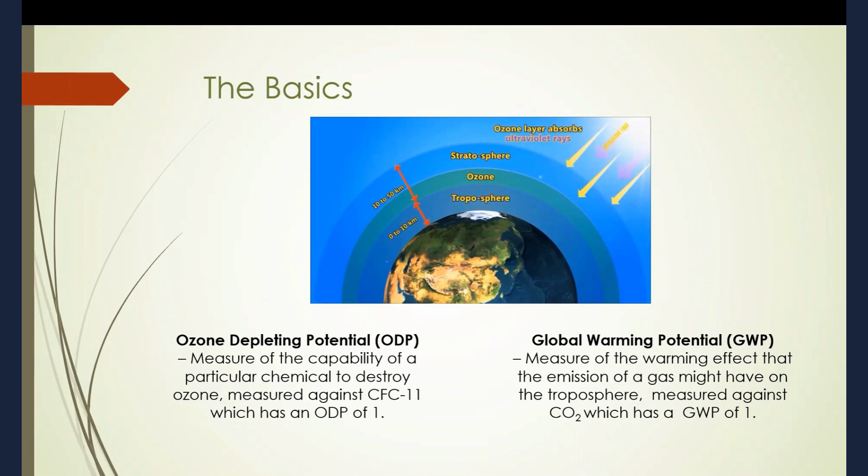Human-caused greenhouse gas emissions are trapping heat in the atmosphere and raising global temperatures. Again, all countries have signed on to the Paris Agreement with the understanding that we're all collectively responsible to try and keep global warming under 2 degrees, and preferably under 1.5 degrees. However, current research is predicting we are on track to cross the 1.5 degree threshold between 2027 and 2042. Climate change is not a future problem, it's a today problem. The 4 main gases responsible for global warming are carbon dioxide, methane, nitrous oxide, and fluorinated gases.

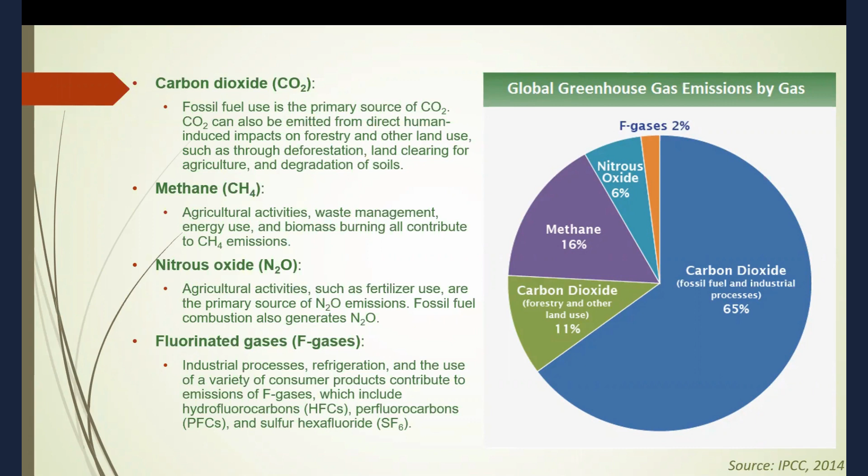These gases will all need to be addressed in some form or another, and they all pack a different punch when it comes to global warming potential. Carbon dioxide, with a global warming potential of 1, accounts for 76% of all greenhouse gas emissions. Conversely, fluorinated gases only take up 2% of total global greenhouse gas emissions, but can have a global warming potential as high as tens of thousands.

Both of these gases have decay rates up to thousands of years. You can take note of the numbers for methane and nitrous oxide, but for this presentation I won't be discussing these two gases as they're mostly related to agricultural activities. As one can imagine, comparing these gases to each other can be difficult, and so CO2e, which stands for carbon dioxide equivalent, was created as a way to compare emissions from one gas to another on the basis of their global warming potential by converting the amounts of gases to their equivalent amount of CO2.

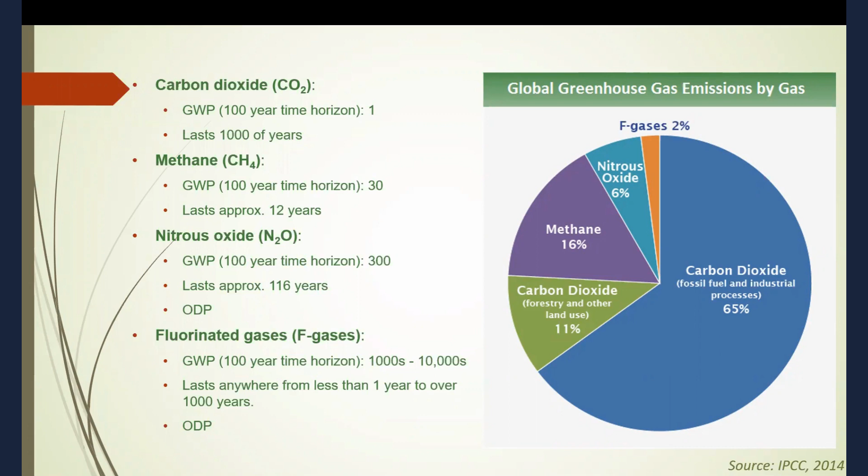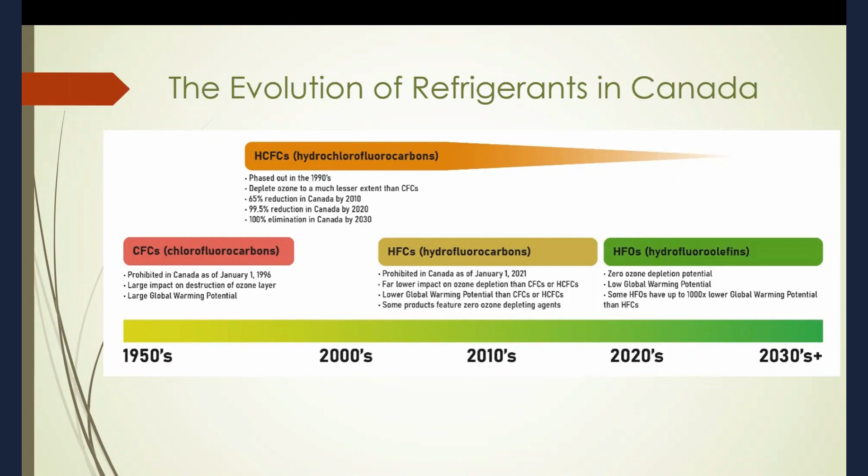I want to quickly touch on refrigerants with respect to Canada. I don't particularly like this graphic because it implies we finally found a green solution to refrigerants, when the reality is we've just slowly been replacing it with something less bad. For the case of HFOs, its low global warming potential is relative when compared to HFCs, but not low in reality.

So on January 1st, 2021, HFCs was the typical blowing agent found in almost all spray and rigid foam insulation, which is now replaced with HFOs.

It's important to realize that a narrow focus on operational emissions can be counterproductive and have unintended climate consequences. The term energy efficiency misses the point when it comes to climate change. Energy and greenhouse gases are not necessarily synonymous. Energy efficiency is just one consideration in an overall greenhouse gas emission reduction strategy, but not a standalone solution to greenhouse gas emissions.

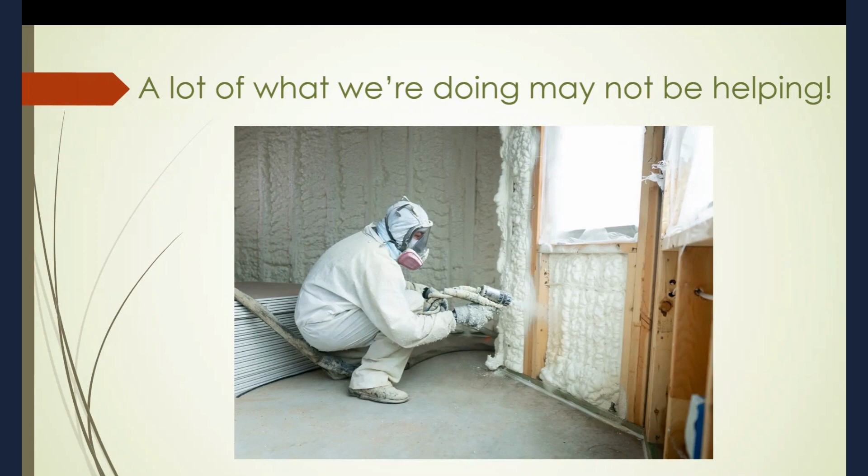I'll be using the terms embodied carbon, material carbon emission, and upfront emissions here interchangeably throughout the presentation, but just want to mention that they're all basically the same thing. The term embodied carbon has evolved over the years, and industry is now leaning more towards calling it upfront emissions.

When we talk about the carbon footprint of a building, people typically tend to look only at operating carbon, but it goes much deeper than that. To assign proper definitions: operational carbon is the emissions derived through the use of the building from day one of occupancy till its end of life. And embodied carbon is the emissions related to making, installing, using, and disposing of a given building material used in constructing the building till its end of life.

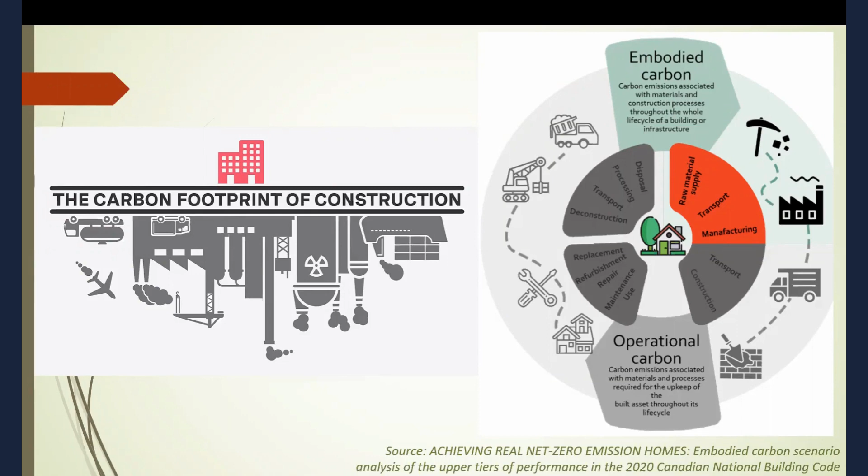Let's go ahead and unpack the image to the right. It's called the carbon life cycle and can be broken up into several stages. The A1 to A3 stage refers to the raw material extraction, transportation, and manufacturing of a product. This first stage of the life cycle is mostly controlled by suppliers and manufacturers. It is the responsibility of the designers to specify low embodied carbon building materials.

A4 to A5 refers to the transportation to site and the installation of the actual product. This is where builders and project teams can control emissions. Can we reduce the impact of transporting things to site or reduce the carbon impact of installing those materials?

B1 to B5 refers to the embodied carbon of the building over its lifespan associated with maintenance, repairs, replacements, etc. Notice operational energy down at the bottom, used to or required to operate the building, is noted here separately.

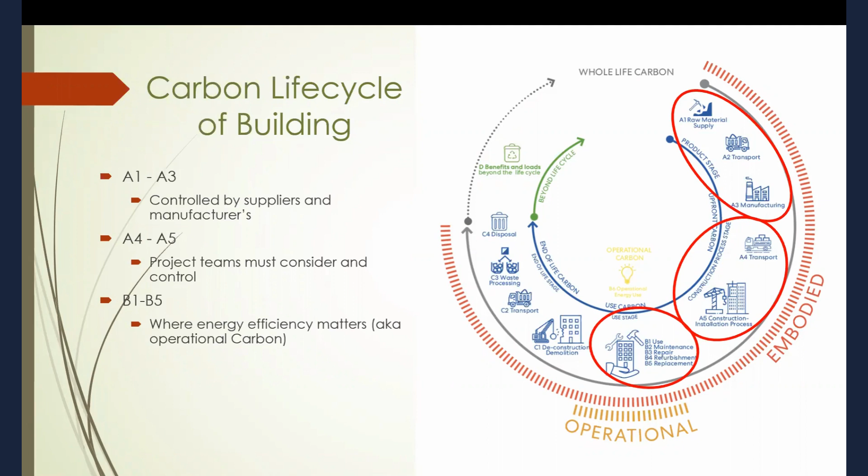C1 to C4 refers to the end of life stage and involves emissions from deconstruction, transportation, waste processing, and disposal. This stage can have varying results for emissions, mostly due to the high level of assumptions that have to be made about what will actually happen to a product at its end of life in 60 or 100 years.

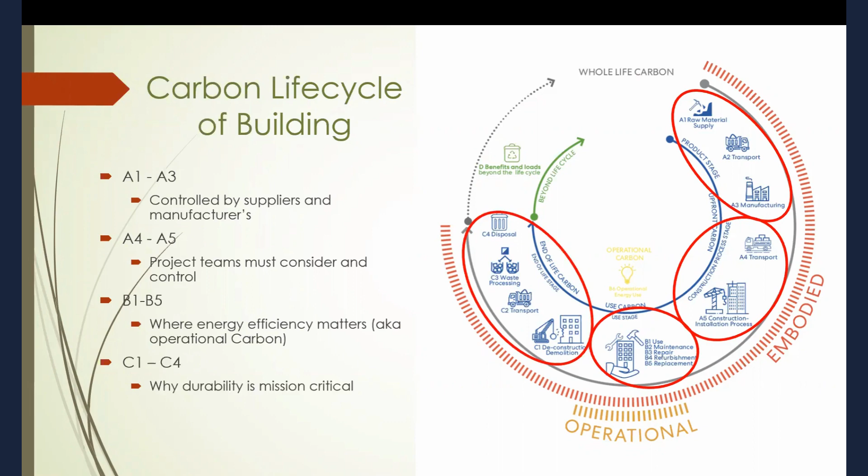The net result of all of these combined is the holistic picture we want to be looking at when it comes to embodied carbon. This image is also commonly presented in a table format, which may be more familiar to some of you. As I mentioned earlier, when talking about embodied carbon, which is the green line, notice that B6 operational energy is actually omitted. However, when discussing whole building life cycle assessments, the blue line, it is included.

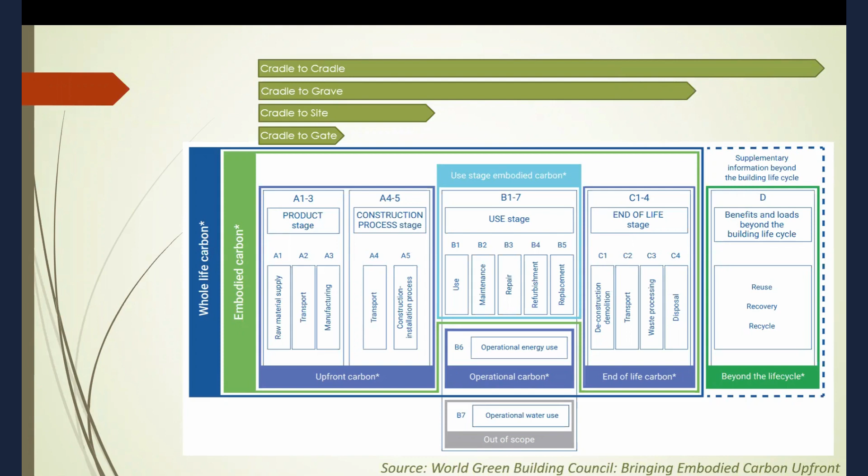Some other common terminology we'll hear throughout this presentation: A1 to A3 is often called cradle to gate. We'll be diving into this specific product stage more in the presentation coming up. A1 to A5 is commonly referred to as upfront carbon or cradle to site. Cradle to grave includes all of module A, then all of module B, B1 to B5, and then all of module C, C1 to C4. And then there's cradle to cradle, which takes cradle to grave a step further and includes emissions beyond the building life cycle that involve giving the product a second life under the reuse, recover, and recycle strategy.

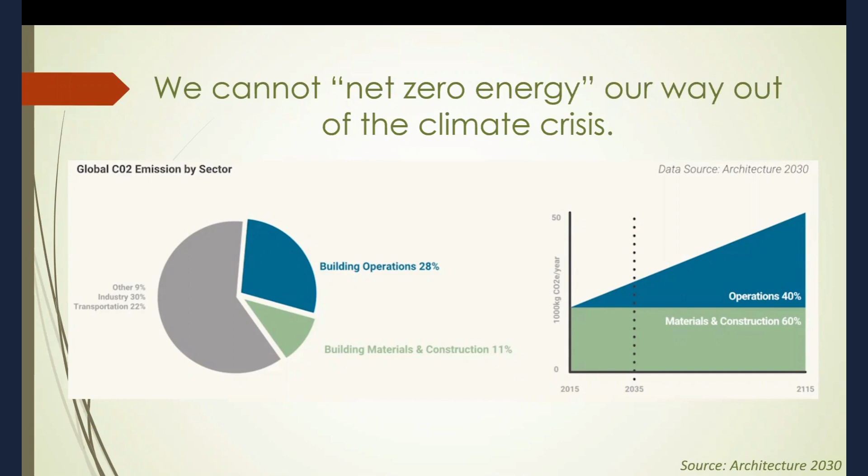If we're serious about hitting net zero emission targets by 2040 or 2050 even, we need to address both operational and embodied carbon at the same time, or we run the risk of striving towards net zero energy at the cost of net zero emissions. Typically, lowering operational emissions involves additional building materials and insulation. So in theory, our embodied carbon could go up as operational emissions come down, if not done responsibly.

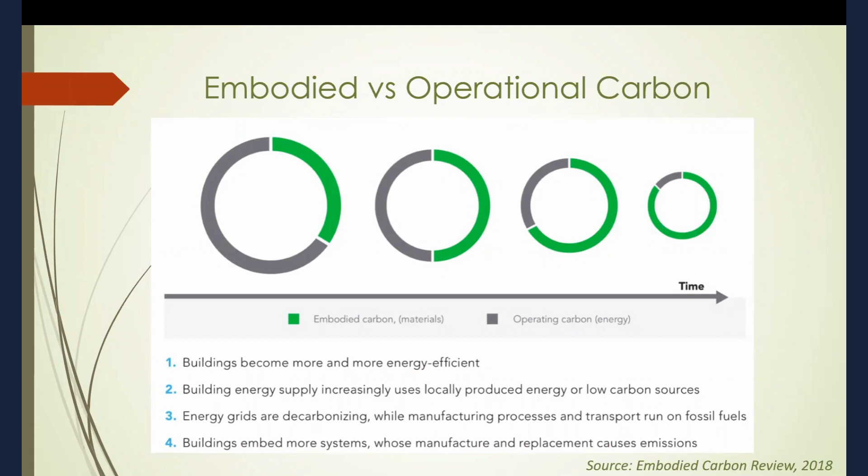As we make strides towards lowering our operational emissions, we can see embodied carbon actually starts to become a larger percentage of the smaller pie, which further drives home the fact that we cannot reach net zero emissions without also addressing embodied carbon. Historically speaking, cradle to gate, which is the A1 to A3 module that I had mentioned earlier, is typically responsible for the vast majority of life cycle emissions, to the tune of almost 70 to 80%.

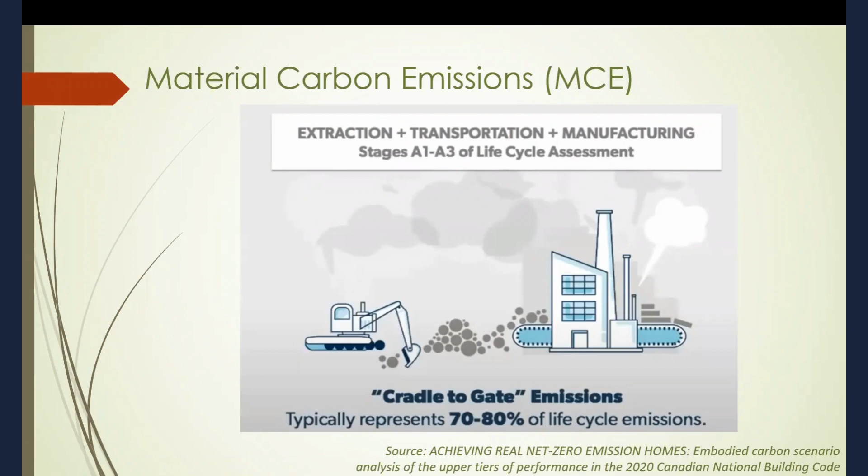To give you an idea of how much carbon emissions we're talking about, a typical low-rise home in North America has an average carbon emission footprint of approximately 250 kilograms CO2 equivalent per square meter of floor area. Canada annually is adding just over 56 million square meters of low-rise homes. This equates to 3.1 million vehicles driven in 1 year, or about 3.6 coal-fired power plants running for 1 year. Again, keep in mind, this doesn't include any operational carbon emissions or commercial buildings. This is just low-rise homes.

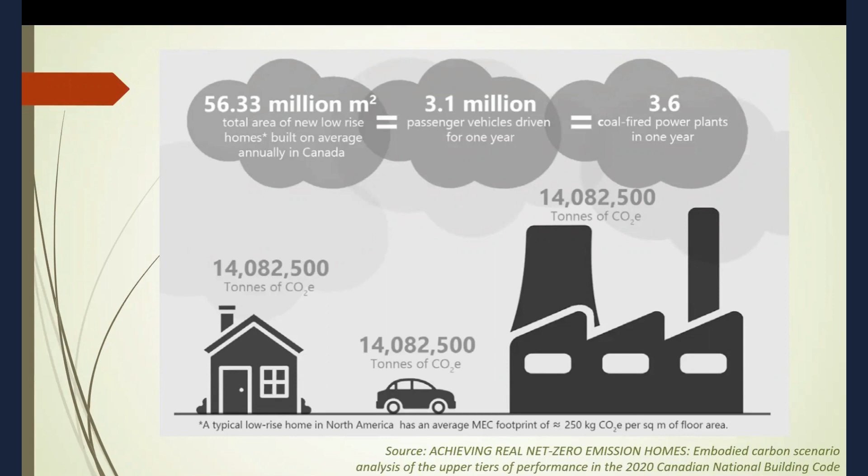So what's Canada doing about it? Well, unfortunately, currently no Canadian building code considers the greenhouse gas impacts of material carbon emissions. This issue is amplified as upfront emissions become a larger contributor to greenhouse gas emissions than operational emissions over the next 2 to 3 critical decades, especially if we're using building materials with high embodied carbon emissions to try and reduce the operational carbon emissions.

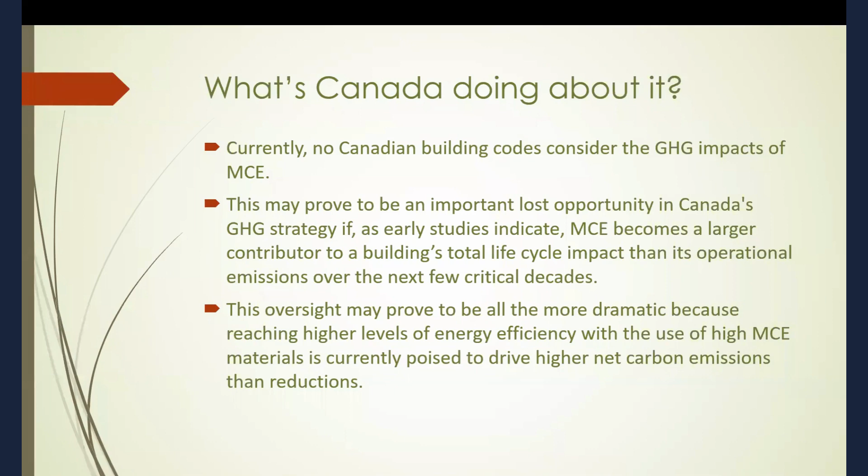Federally, Canada introduced the Federal Greening Government Strategy, which mandated reporting of embodied carbon in structural materials of new projects by 2022. By 2025, this would turn up a notch and mandate reductions in structural materials by 30%, along with complete whole building life cycle assessments. They also introduced LCA squared, which was designed to support low carbon procurement of materials. This policy only applies to new federally owned projects. And I believe there was an announcement today that this is actually being updated and tightened to become a little bit stricter and happen a little bit sooner.

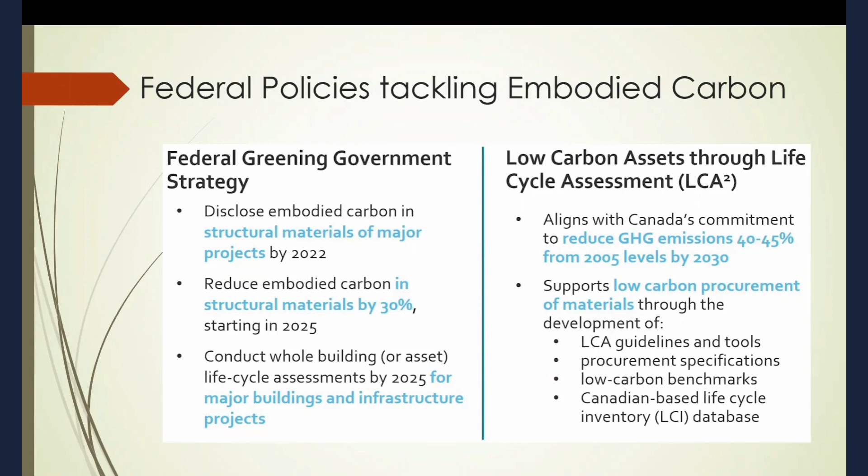On the provincial side of things, no province has come forward to specifically address embodied carbon head on, but BC is probably the closest, and that is largely due to the work being done municipally in Vancouver. Vancouver created the Climate Emergency Action Plan, which sets a target of a 40% reduction in embodied carbon emissions by 2030 from their baseline 2018 year. Their green building policy for rezoning also mandates reporting of cradle to grave emissions.

Toronto developed the Toronto Green Standard version 4, which mandates all city buildings and buildings being built to Tier 2 report cradle to site emissions for structural and envelope materials. Tier 3 buildings must demonstrate a 20% reduction in cradle to grave emissions against a baseline building. Edmonton currently only requires reporting of cradle to site emissions.

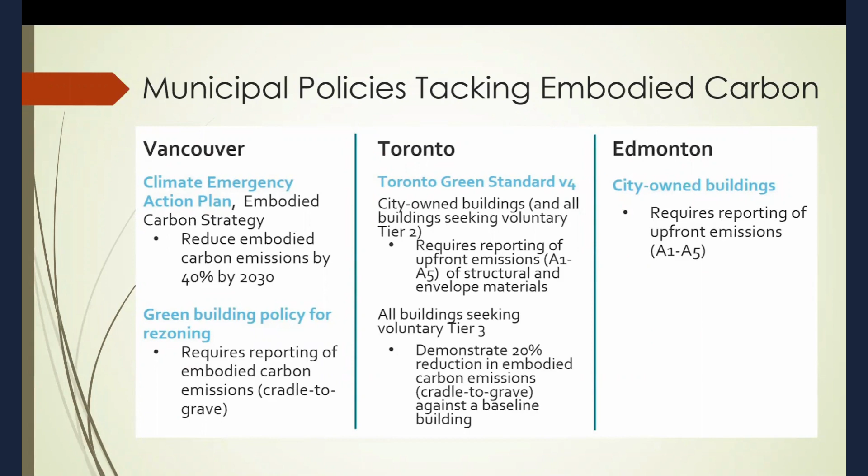I also want to quickly mention Vancouver's brand new near zero applied research program, where builders are actually being compensated financially based on the amount of carbon reductions they can achieve in their new builds. These are not dollar amounts to scoff at, and it will be very interesting to see the final results of the program in terms of net emissions avoided. It would be wonderful to see something similar offered here on the East Coast.

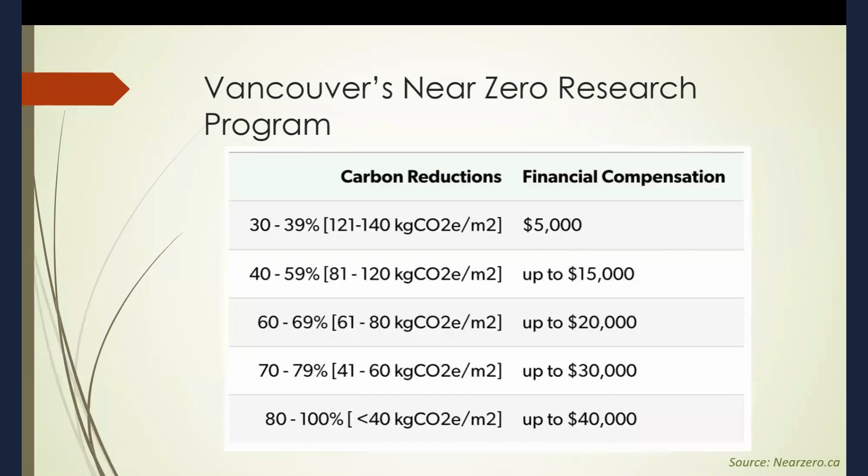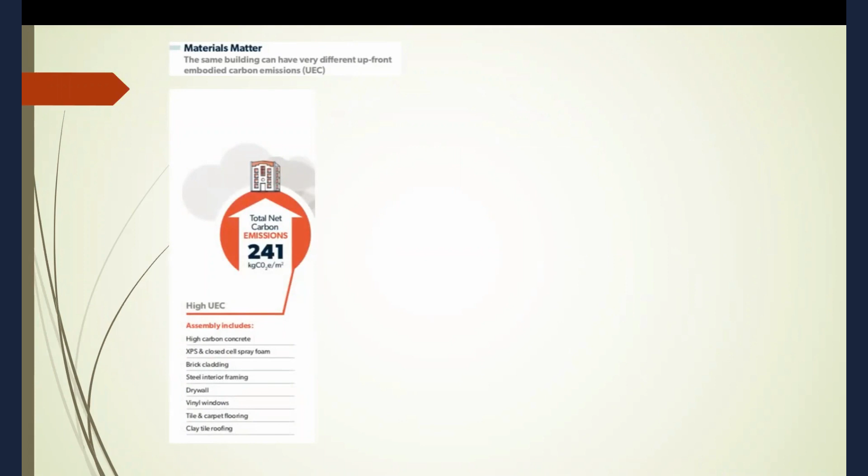So let's apply this to an example and have a look at the significant difference we can make. This was a study done by Chris Magwood for a sample building modeled with a wide array of conventional and alternative building materials to determine the greenhouse gas impact of upfront embodied carbon emissions, from using worst possible materials, to typical construction materials, to best conventional materials, and finally best possible materials. I also want to point out that under Vancouver's new research program, even typical construction is still eligible for $15,000 back as a reimbursement or as a rebate. And the remaining two are eligible for the full $40,000 rebate.

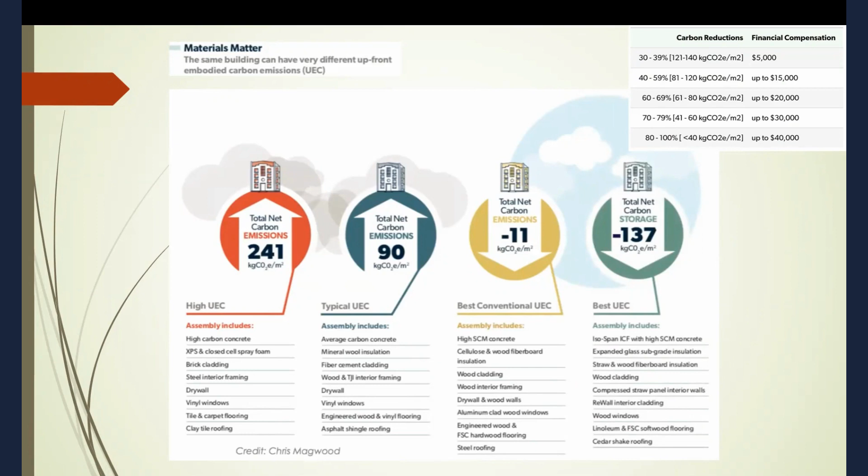So it's quite easy to try and get these rebates and actually drive change in your buildings, even with typical today's construction.

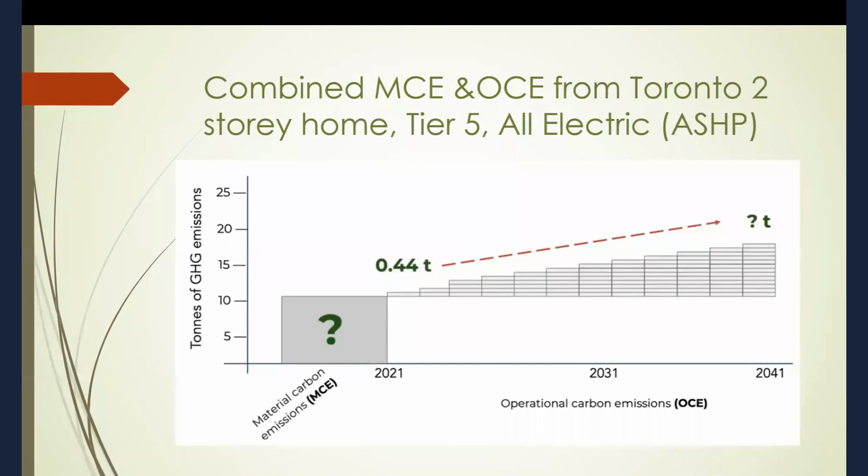So a little bit more about the study. It was covered over a 20-year time frame and combined the material carbon emissions and the operational carbon emissions of a two-story building built to Toronto's Green Standard Tier 5, which is essentially passive house, all electric with an air source heat pump to handle its heating load, along with Ontario's relatively clean energy source. The study highlighted the amount of years it would take operational carbon emissions to surpass material carbon emissions in each of these 4 sample buildings.

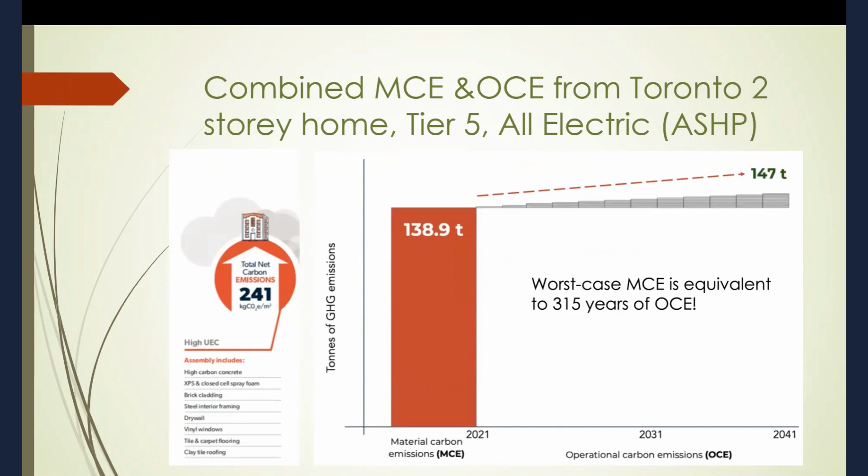So in our first sample building using worst possible materials, we actually see it takes 315 years of operational carbon emissions to surpass material carbon emissions. Dropping down to the second building with typical construction materials, we get 71 years, which is significantly better than the 315 years from the previous example, but nowhere close enough to helping us reach net zero by 2040 or 2050.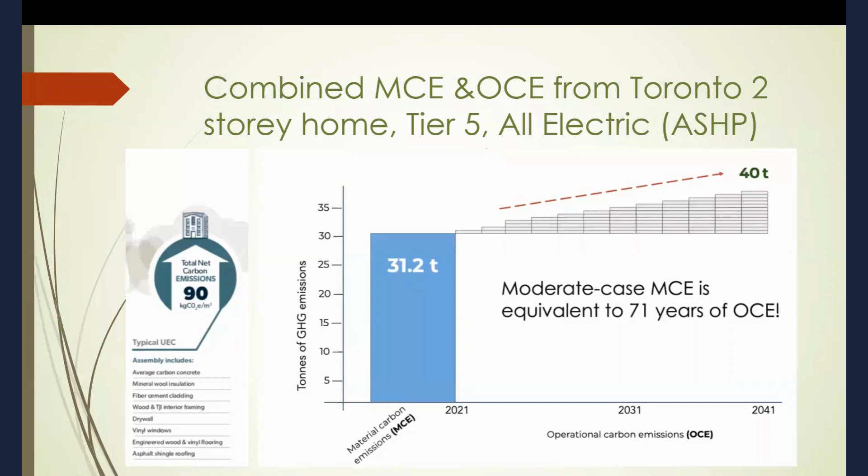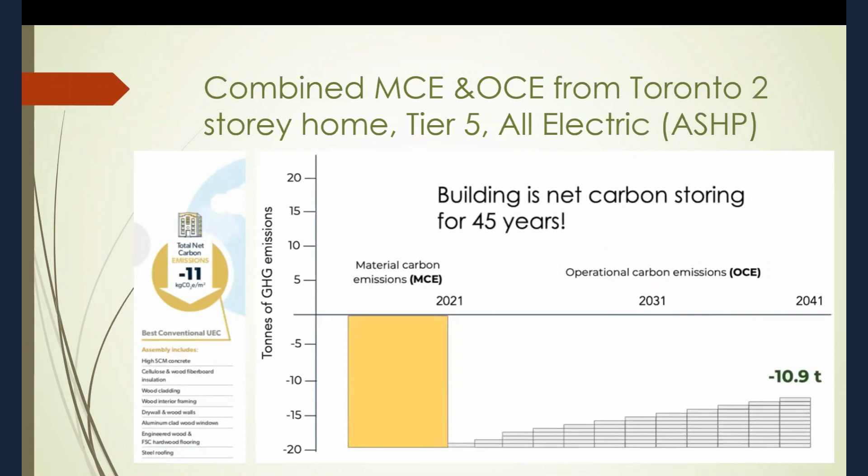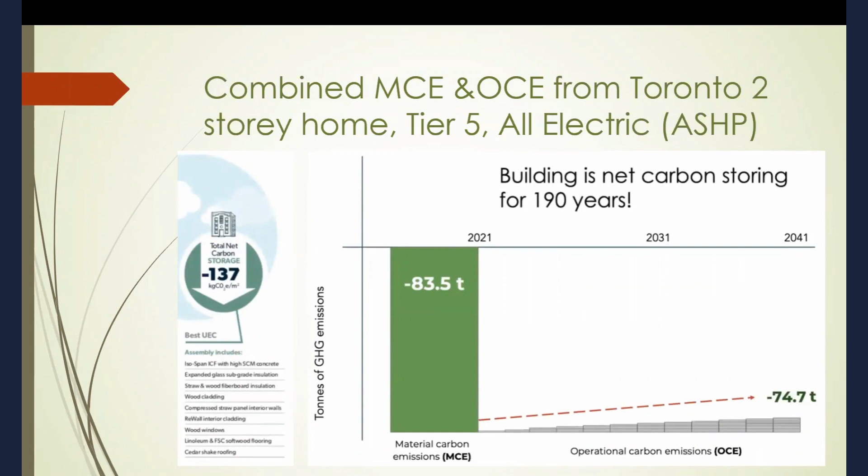In our third building, using best conventional materials, we actually see carbon being sequestered for about 45 years. So definitely better. And then in our fourth building with the best possible materials, we get an impressive 190 years of carbon storage. The study goes on further to compare the difference in net emissions over 20 years between a high performance and a low performance, i.e. code built building along varying degrees of embodied carbon. As you can see, it's the buildings on the right that we should be striving to build.

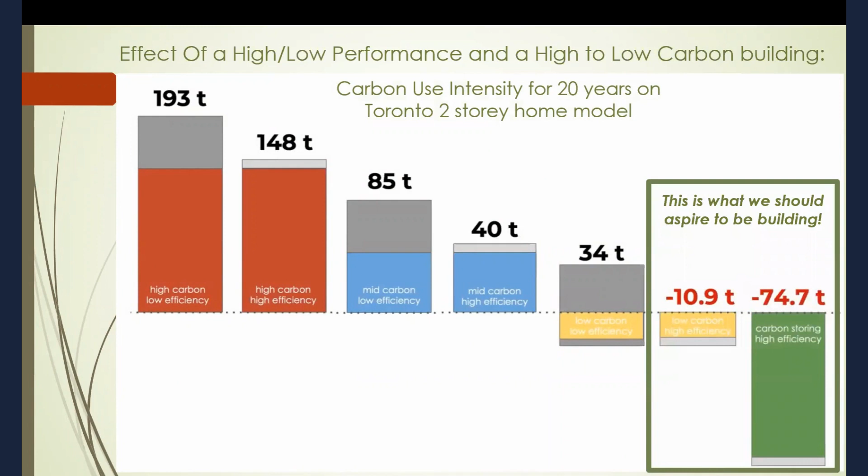So how are we going to get to net zero carbon or net zero emissions? We can set realistic thresholds for combined upfront and operational emissions. Carbon use intensity is used to steer the low-rise building sector in a climate positive direction that is measurable and achievable. And with this plan, it just basically shows us slowly moving towards the best possible materials. We don't need to be doing it today, but we just need to stop using these high carbon worst possible materials and just start slowly shifting the building industry.

So we can do this by lowering upfront embodied carbon while maximizing carbon storage in building materials, decarbonization of our electrical grids to cleaner sources, and also maximize energy efficiency as required. Of these 3 aspects, upfront embodied carbon and decarbonization of our electrical grids is shown to have the largest impacts on lowering carbon use intensity.

Decarbonization of the electrical grid is something that is most effectively tackled at the government level, while upfront embodied carbon is the area in which individual designers, builders, and homeowners can make the most difference in carbon use intensity. We should not set our expectations at mere carbon reductions. We should aspire to this type of realistic net carbon storage in all of our buildings.

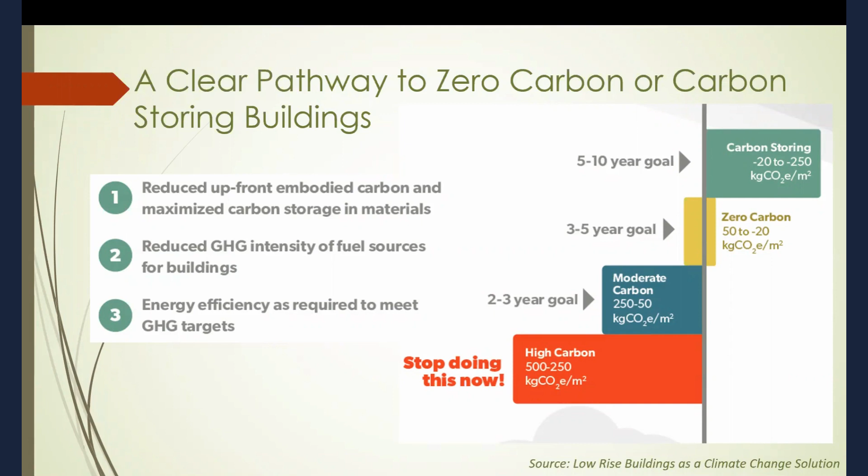So I've mentioned the term carbon use intensity a few times now, but basically carbon use intensity, or CUI, is a metric that adds the home's operational carbon emissions and the energy source emissions to its material carbon emissions to demonstrate the total impacts of these emission factors. Since operational carbon emissions accumulate annually, the CUI metric is usually associated with a particular time period, either 20 or 30 years.

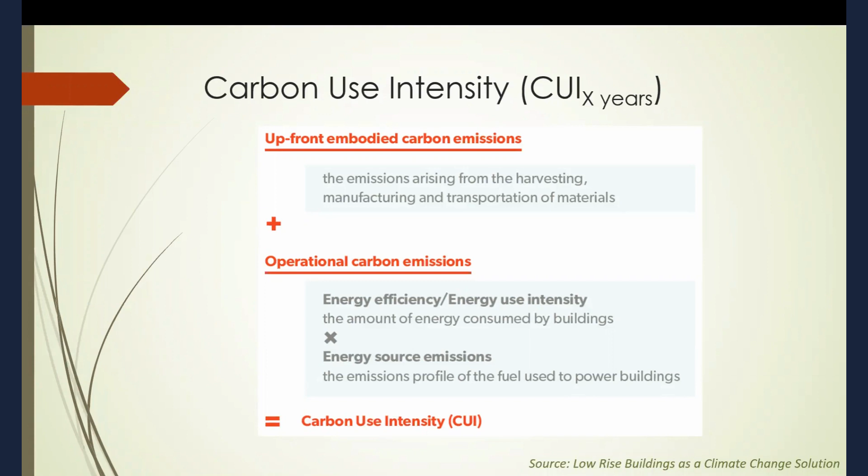Carbon use intensity examines all 3 aspects of greenhouse gas emissions from the low-rise building sector. The output unit is kilograms CO2 equivalent per meter squared. Only by considering all 3 emission factors can we design truly zero carbon buildings. Ignoring any one of these aspects of building emissions raises the possibility that our efforts are at best incomplete or at worst counterproductive. A zero carbon building needs to have a CUI of 0.

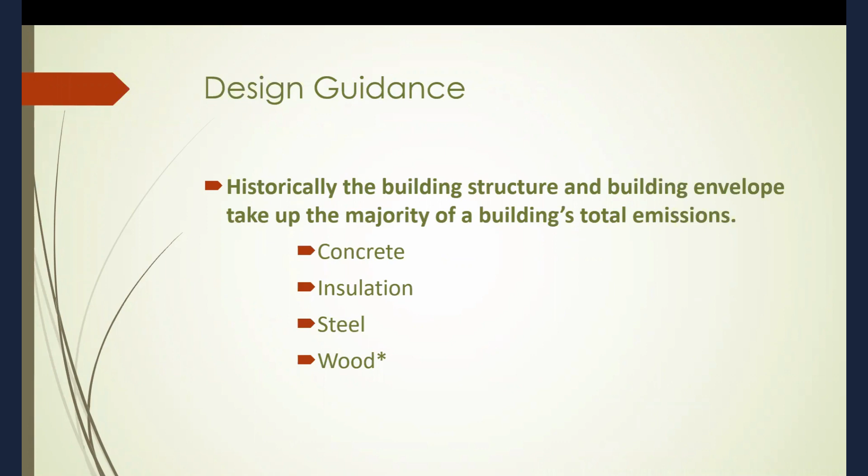So switching over to some design guidance, historically the structure and the building envelope take up the majority of a building's total emissions. So we'll chat about these 4 different materials and what we can do to design better with them.

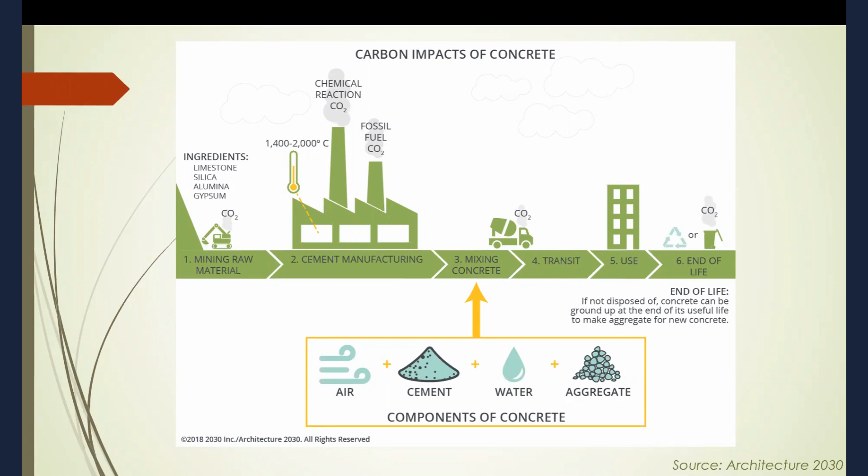For concrete, it is the cement manufacturing process that drives the embodied carbon of concrete up so high. Ironically, CO2 with a global warming potential of 1 is actually considered a low global warming impact. But the fact that concrete is the second most consumed material in the world after water makes it a problem that we cannot ignore. So for best practices, you typically want to reach out to your concrete supplier and ask if they have available low carbon mixes, and if they have the environmental product declarations to go along with them, or EPDs.

EcoPact by Lafarge or EvoBuild by Lehigh Hanson are two different low carbon concrete mixes from two different manufacturers that are both working hard towards creating a zero emission concrete mix. This is a race to the bottom that we can all look forward to.

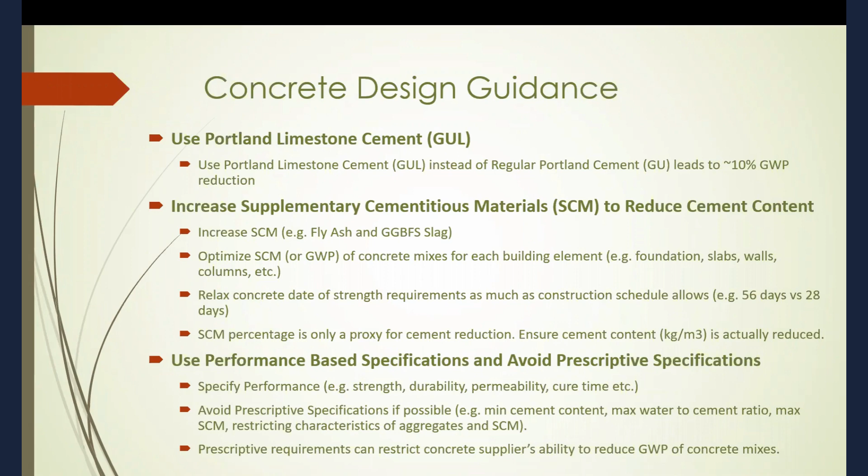We also want to try to minimize cement. If the project schedule allows it, aim for longer cure times, increase supplementary cementitious materials, or SCMs, to the 30 to 40% range, or even see if CO2 injection is possible. As a side note, with concrete, we should also be trying to maximize recycled steel in the rebar whenever we can.

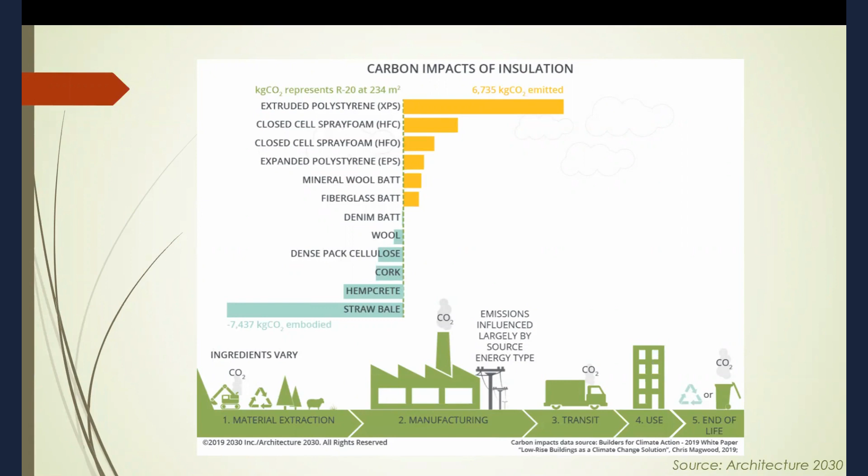Moving on to insulation. Insulation choices can significantly impact a building's carbon footprint for both embodied and operational carbon, either positively or negatively, depending on the material used. Operational performance targets should be balanced with embodied carbon targets, using natural materials that sequester carbon and blown-in insulation instead of rigid or spray foam applications are best for lowering embodied carbon.

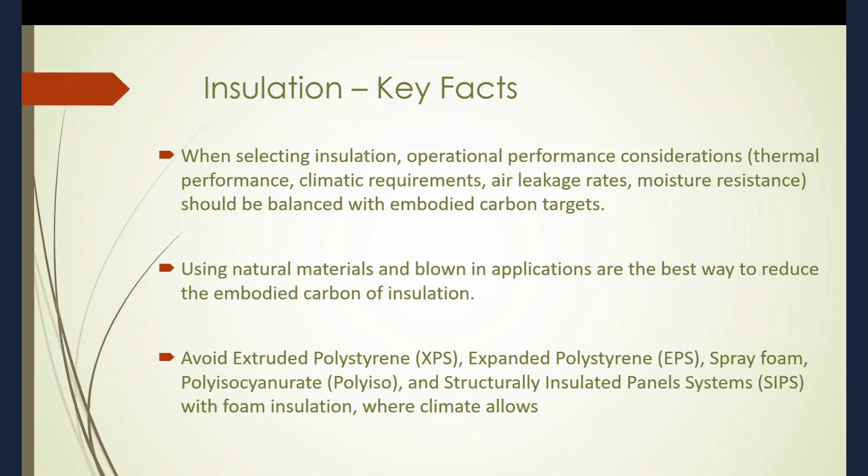Avoid XPS, EPS, spray foam, polyiso, SIPs, and this includes ICF blocks. All of these insulations are petroleum-based products that require significant energy to manufacture, resulting in a high embodied carbon footprint. Where climate and project requirements allow, specify lower carbon alternatives.

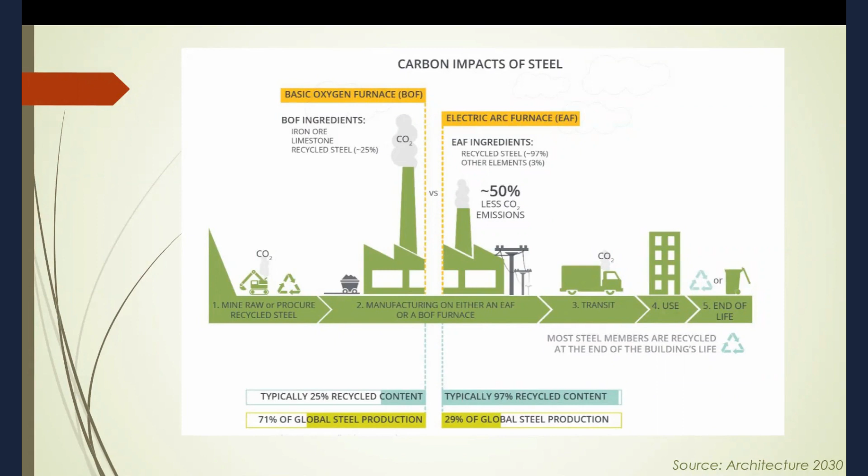So obviously we want to try and specify steel from electric arc furnaces, but unfortunately, there's just not enough recycled steel in the world out there. A lot of the steel buildings that we have up are typically still in place and are being used. So we try to specify it as much as we can, and we fill out the rest with virgin steel.

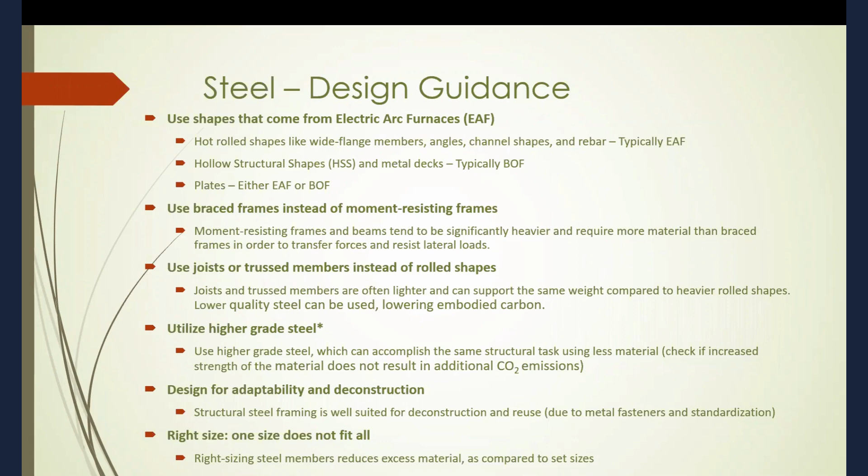Wood is noted here because it does double duty in the sense that it sequesters carbon during its growth stage and locks it in for the life of the building. It should be noted that there are, of course, emissions related to the manufacturing and transportation of wood, but this is far outweighed by the amount of carbon stored. And this is a good thing, but again, we need to ensure it's being done responsibly. As designers, it's important that we only spec wood from certified forests.

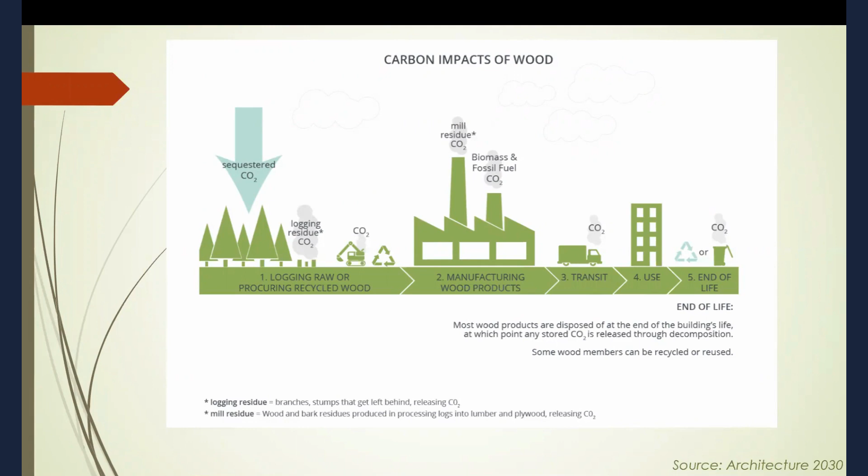Luckily for us, Canada is a leader with sustainably certified wood, with BC contributing the most certified acres out of any province. Forest Stewardship Council, FSC, and Sustainable Forestry Initiative, SFI, certifications evaluate for basic forest stewardship by ensuring that harvested areas are reforested, and that laws are obeyed and there is no unauthorized or illegal logging taking place.

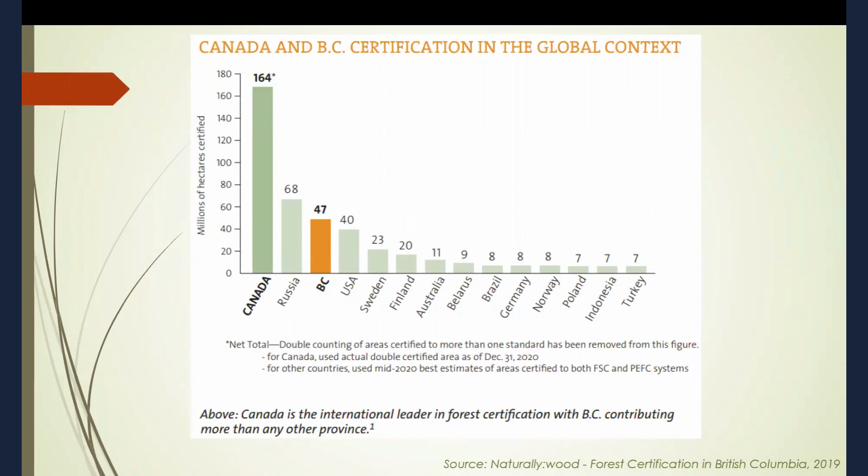So not only do we want to be speccing wood from sustainably managed forests, but we also want to avoid wood harvested from old growth forest. When possible, try and use reclaimed, salvaged, or recycled wood products to prolong the carbon storage. And lastly, try and spec fast-growing wood since they store more carbon faster than the slower-growing trees.

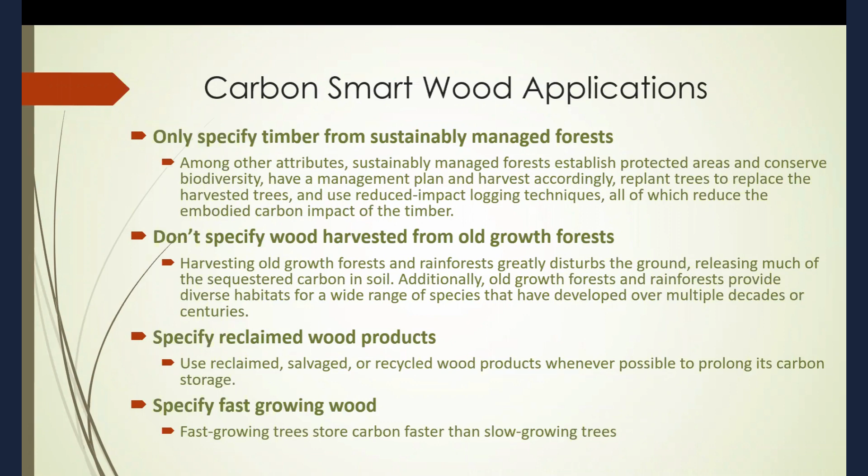We want to design for durability. That involves ensuring the wood is protected from heat and water and it'll last the lifetime of the building. Understanding building science and designing vapor open assemblies will go a long way in terms of durability. Also, we want to be speccing the right structural wood, but like steel, we need to verify if the net emissions are better or not.

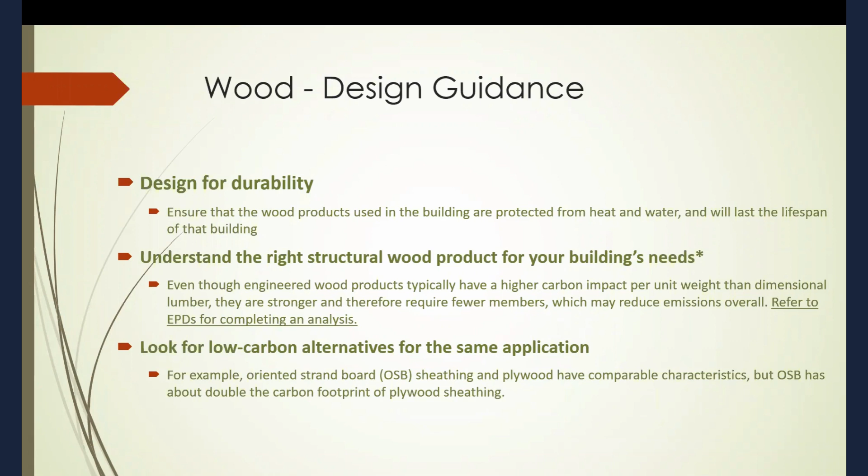Finally, we want to try and pick low carbon alternatives for the same application. An excellent example is OSB and plywood. Both have similar characteristics, but OSB has double the carbon footprint of plywood.

So we know embodied carbon's not great. What do we have in our toolbox? The reality is we can't manage anything we don't actually numerically quantify, and EPDs are exactly that. They're a third-party verified nutrition label of sorts for the environmental impacts of a certain product, and in our case, this would be building materials.

Now, there are three types of EPDs. There's industry-wide type 3 EPDs, product-specific type 3 EPDs that are internally reviewed, and then product-specific type 3 EPDs that are third-party reviewed. This is the one that kind of makes sure that there's no greenwashing. So when reviewing EPDs, make sure you pay attention to get to the type of EPD it is.

An important note I also want to mention is although EPDs educate consumers on the product they're for, they're for disclosure purposes only. This means the product itself may not necessarily meet any environmental performance standards. Basically, just because something has a nutrition label doesn't mean it's healthy for you to eat.

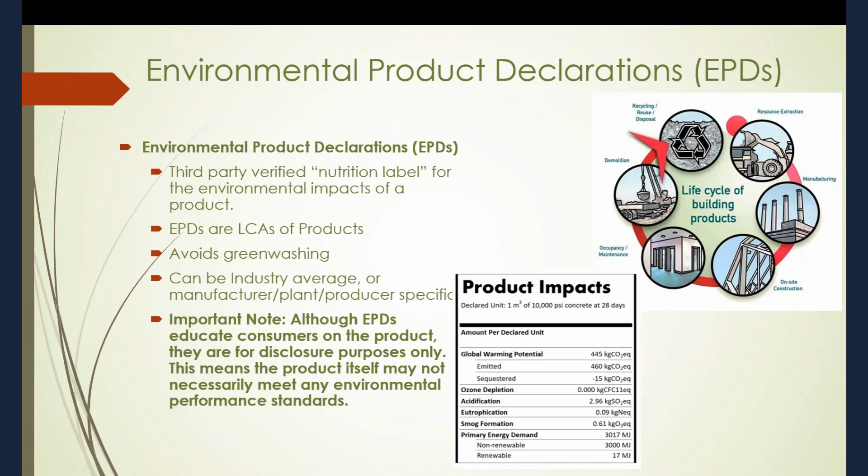EPDs start first by defining the product category rules, which sets the boundaries within which products' environmental impact will be analyzed, i.e. cradle to site versus cradle to cradle, etc. Then after the boundaries have been determined, a lifecycle assessment of the product can be completed and the results are inputted into an EPD format, which is then third-party verified before being entered into an EPD database.

All EPDs are presented in a standard format that is ISO compliant. LCA standards follow the standard ISO 14040 and ISO 14044, and EPD standards follow ISO 14025 and EN 15804.

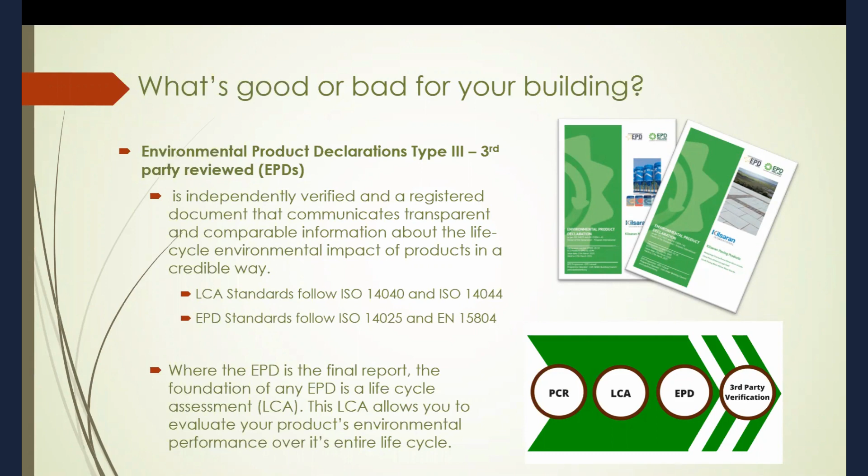EPDs are critical in determining the embodied carbon and other environmental impacts of products that we use in our projects. The more the AEC industry and building owners request and require EPDs, the greater the availability and accuracy of the data. This drives the market in a positive direction towards increased transparency, allowing stakeholders the opportunity to make more informed decisions.

So whole building LCAs basically compile all of the EPDs for every material that's used and their quantities used in a building to determine the total environmental impact for the life of the building. So these would include the embodied carbon in the materials and then also the operational carbon for X amount of years.

One of which is embodied carbon and is reported as global warming potential on a whole building life cycle assessment report. Typically, the sustainability consultant would design a baseline building as per normal construction practices for that area, and then apply reduction measures to the baseline building in order to achieve their target emissions.

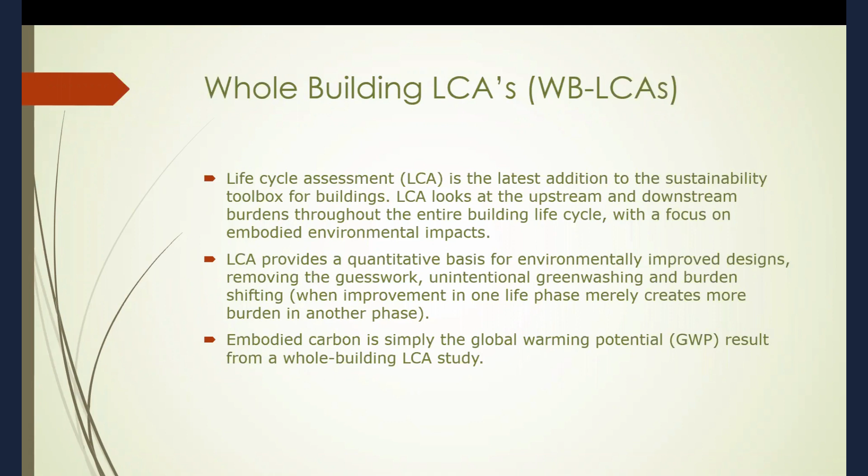Whole building life cycle assessments are done via various software tools that pull data from specific EPD databases. So this list isn't exhaustive by any means, but GABI is one of the largest EPD databases in the world and includes EPDs from all sorts of industries, including building and construction.

EC3, or the Embodied Carbon in Construction Calculator, is a free and easy to use tool created by Building Transparency that allows benchmarking, assessment, and reductions in embodied carbon, focused specifically on cradle to gate emissions of the construction materials only. It is an open access database of manufacturer-specific EPDs. I strongly recommend anyone wanting to find quick EPD comparisons of building products for their projects to check out this tool.

For part 3 buildings, Athena is free, but mostly uses industry average values with very little manufacturer specific values for EPDs. So it's good in like your schematic design stage or early on.

Tally is designed only for integration with Revit with limited EPDs, not a lot of Canadian EPD data, unfortunately. Tally Cat aims to solve that a little bit by integrating with EC3, pulling the database from EC3's database, which are manufacturer specific EPDs. This is available in its beta version currently, and it's available for download for free. But again, it's only a plugin for Revit.

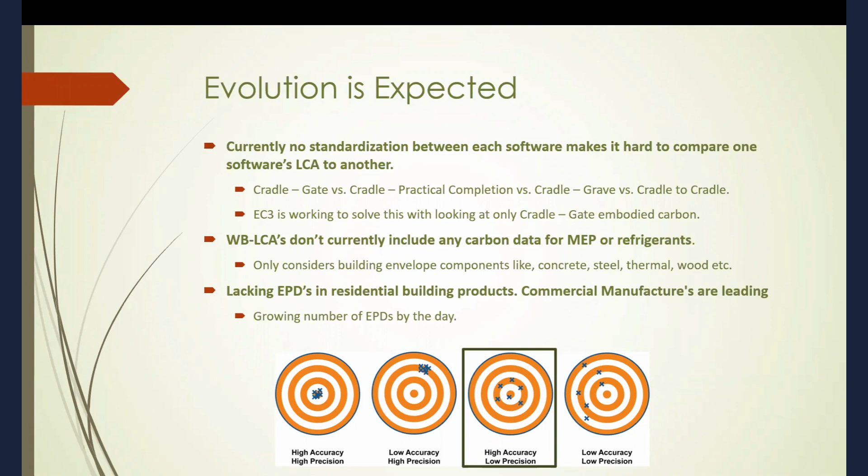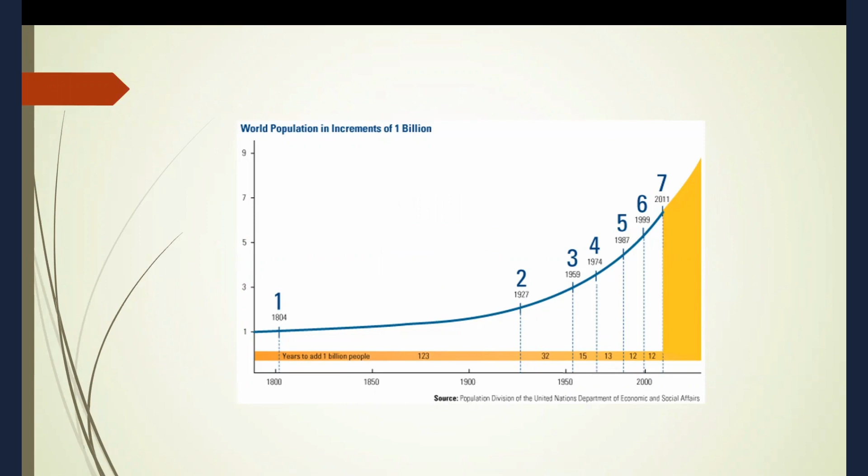The Earth's population is growing at breakneck speed, and this image is old - I think we're already at 8 billion this year. We're going to need to construct more buildings to house all these people, and we need to be making sure we're doing it responsibly. This is a common thing we've seen thrown around, that we're going to require to build a new New York City every month for the next 40 years to be able to house our entire population on planet Earth.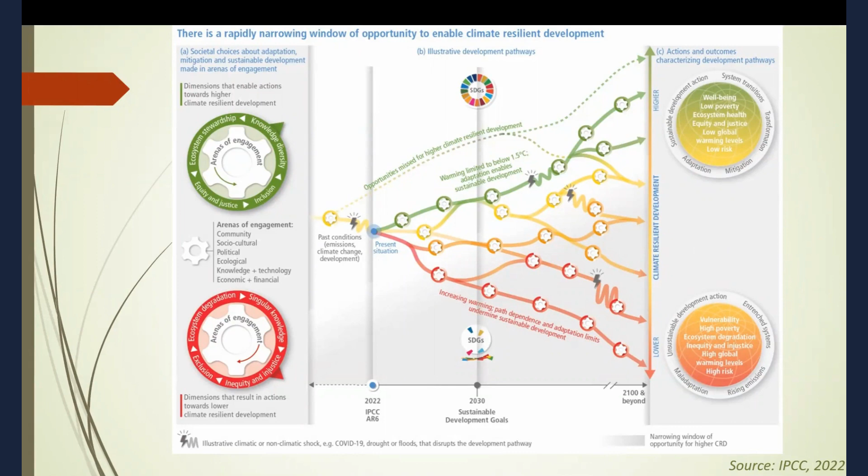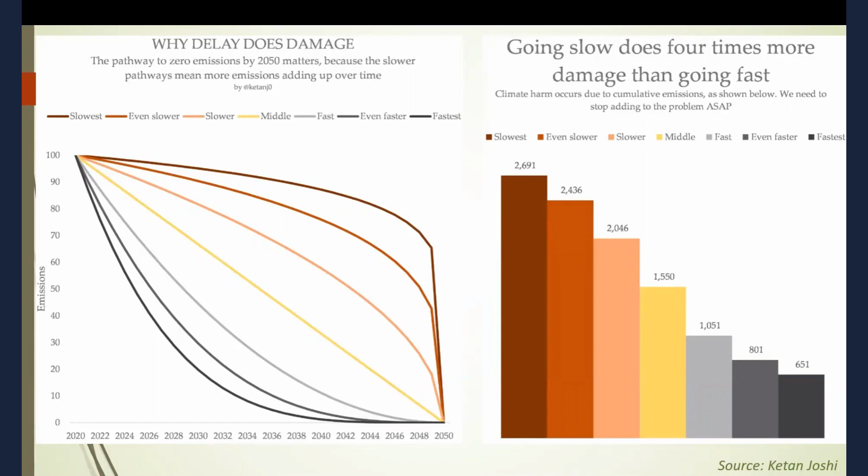By how much exactly? Ketan Joshi put out a report on the pathway to net zero emissions by 2050, comparing the difference in addressing emissions on the front end, which is this graph down here, versus the back end, which is up here - so basically now versus later. It's roughly 4 times more emissions released into the atmosphere if we wait later to curb emissions.

This is a great little mnemonic I like to use for designing good buildings, and we basically just need to start building smarter: super insulated, mechanically ventilated, airtight, really good windows and doors, thermal bridge-free design, and always considering emission reductions and doing everything responsibly.

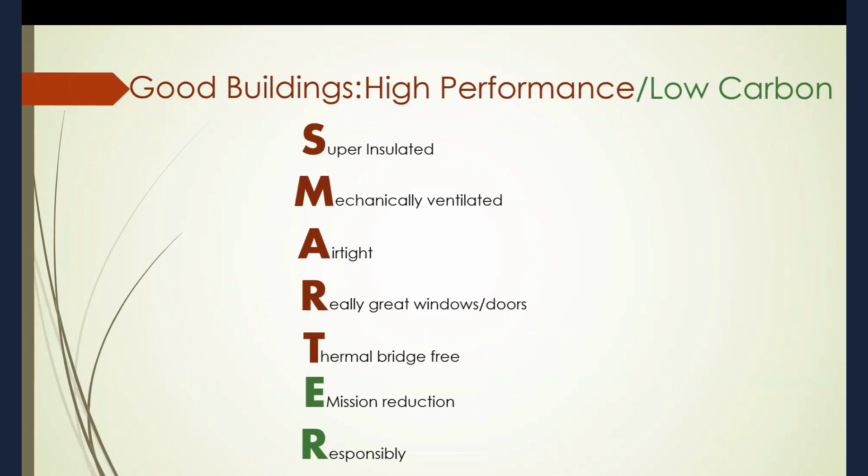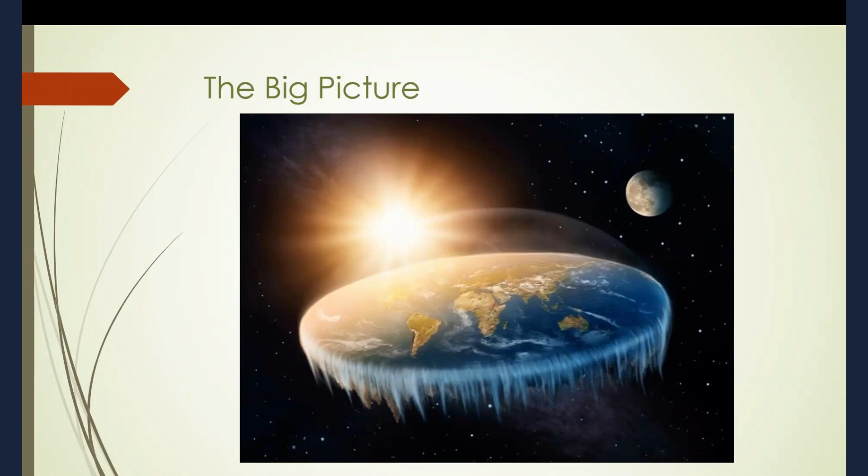I encourage you all to think about the embodied carbon of the materials you're choosing for your next building project. The impact you make on climate change is real and significant and should be started today. Hopefully I've helped shed some light on embodied carbon and the importance of addressing it if we're aiming for net zero emissions in the next 20 or 30 years.

That's it for my presentation. Thank you all. I can try and answer any questions you may have now.

Okay, that was great, Valentine. Thank you. I especially love the part on the practical advice when you're looking at different building materials like concrete and steel.

Yes, a lot of people - even the insulation, for me personally, when I was learning this stuff years ago, insulation was what blew me away. You kind of just think of insulation as doing good and saving you on your operational energy, but then when you start looking at the embodied carbon for stuff like XPS, you're just like, these are actually horrible products for the environment.

The thing that really needs to happen is that EPD, that nutrition label, needs to be provided on every building material, exactly like a nutrition label is on all food at the grocery store. So that when someone walks into a Home Depot and they're looking at insulation, they can say, okay, this insulation has the same performance as this insulation, they both cost the same, but this one is significantly better for the environment, so I'm going to choose this one. But right now, the average consumer doesn't have that data available to them, and they're not necessarily aware about it.